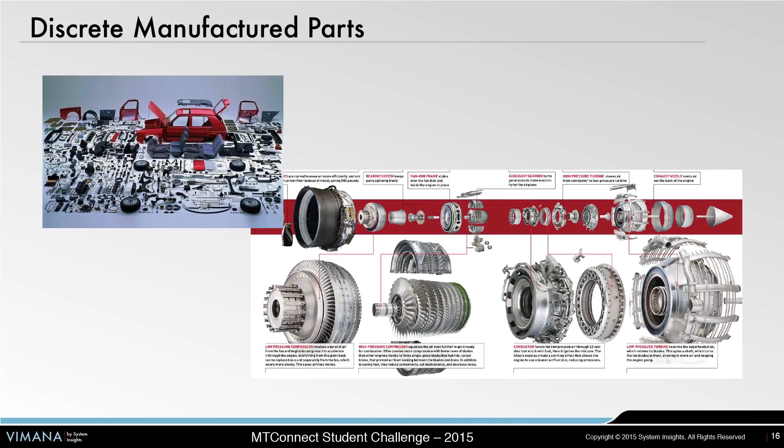Discrete is basically taking something like here, you have a raw forging of a drive shaft, you do a series of machining steps on it, you come up with a finished part, and then there's an assembly process where you put the various bits and pieces together.

MTConnect, to narrow it even further, is interested in that manufacturing step, basically the processes involved in either additive or subtractive material—adding or removing material from various pieces of metal, plastic, whatever.

The other thing we're concerned about, and getting into right now in a big way, is process flow. If you think about things like the digital thread and how manufacturing is executed, it's not just on one machine—you go from machine to machine. This is actually the process for making a drive shaft. There are all these different processes, and each process is executed on a different set of machines.

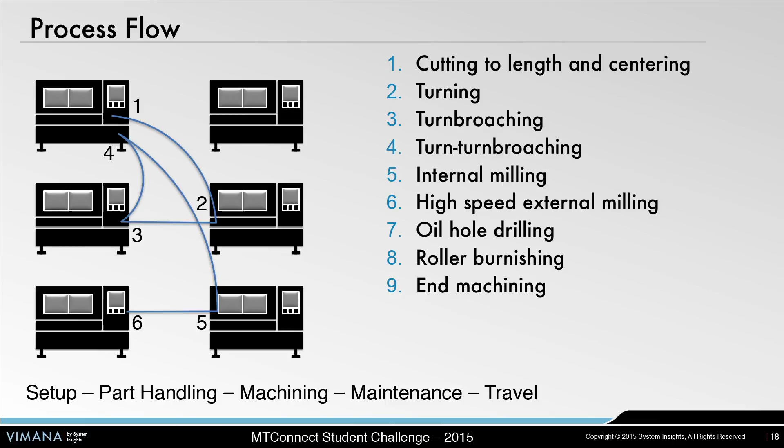So there'll be travel time, part handling, setup and tear down of those different machines, and so forth. We're concerned about basically all of these timings and how the process flows, how effective it is, and how optimally we're executing those different processes on those different machines.

If we think about it from the standpoint of data, the machines on the floor are giving a huge amount of data out. So if you look at your standard CNCs, lathes, and everything else, don't try to read it - I'll give you examples later. So you're getting a lot of data out of these different machine tools.

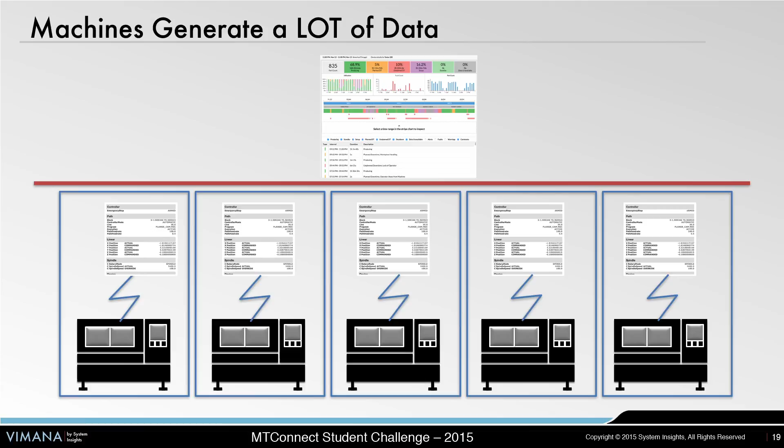But to be able to actually do some analytics and to be able to understand how the processes are performing, contextualized within the entire manufacturing process, it's not possible right now because there's this barrier between the information coming off of the machines and whatever kind of analytic applications you have.

If we look at the entire market, we look at what's going on right now, 95% of the shops out there are what we consider dumb. Basically, data collection and even basic monitoring - collecting data from machines, understanding what the machines are doing at any point in time - is very low. The number of shops actually doing this, especially small to medium manufacturers, very few of them are doing anything even simple like monitoring.

We have monitoring applications, a lot of those out there today. So this step here is not too hard to get to, but a lot of people are still using paper and pencil and stopwatches. The next step up is things like real-time analytics.

That's when you take the data and you start analyzing it and understanding what's happening and why it's happening. So you're able to take your basic monitoring, backward-looking reporting, and start to predict forward - like, okay, the machine is down, why is the machine down? Can we tell from the data and the context of the process why this machine is not operational right now?

The next level you can go up to is proactive, where I can now say, I see that this machine is about to go down, let's do something about it. Let's alert somebody so it doesn't go down and we don't lose production.

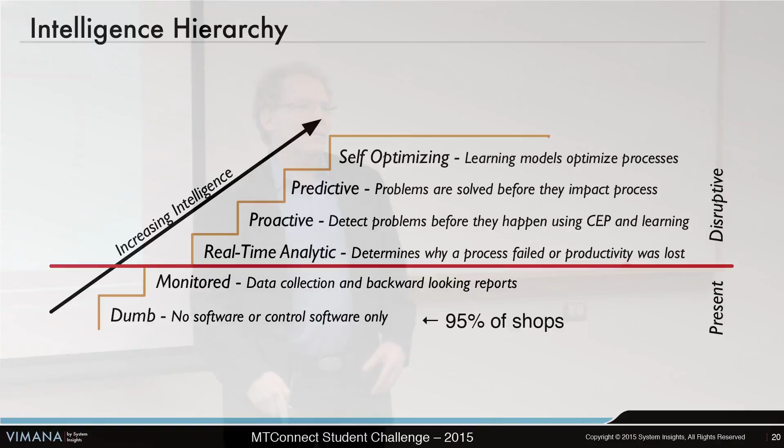The next step is where the systems actually start to self-optimize. So we're still talking about human-in-the-loop processes. Now we start talking about things like self-optimization, where you can actually have the processes figure out optimal strategies for being able to manufacture parts.

It's not just where I'm going to have a set of pre-described weekly schedules. Now the system can work around various different congestion, maintenance issues, tooling issues, process issues in near real time or real time, make decisions, even decide, send it out, keep it in, these kind of things.

Of course, the final step is where we start getting into your Terminator 2 Cyberdyne type scenario, where machines take over the world and kill all the humans. But that's to come later. So we're still trying to get to this step here. We're a long way from that.

So anybody familiar with the small to medium manufacturer? Has anybody worked in a shop or done an internship there? Okay, so a few people. That's good, more than I had last time.

So small to medium manufacturers are typically companies that are below 500 people and have modest revenues, but they do make up a large portion of our industrial base. If you look at the number of firms, there's actually around 250,000 firms out there right now. So it's a huge number of these.

So we think about how they interoperate with everybody else. Basically we look at supply chain tiers. Your OEMs are here - those are big companies like Boeing who sell aircraft. But if you look at Boeing or GM or any of these other big companies, there's actually a huge number of tier 1s and tier 2s and all the way out to tier 3, 4, 5 suppliers that come in and provide parts to those companies. They don't make everything themselves.

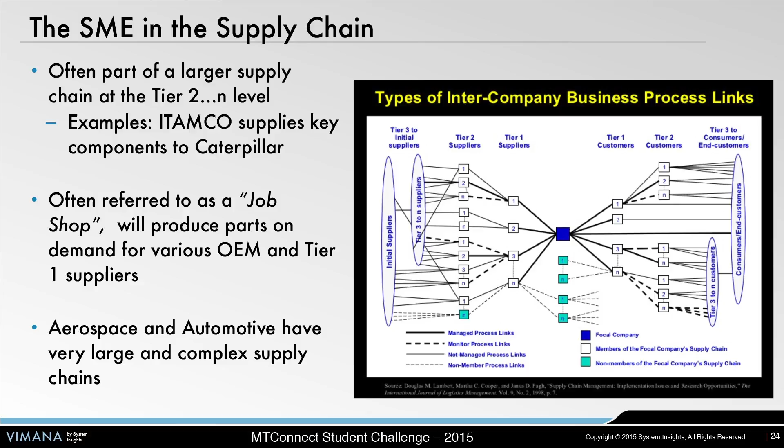Actually, a lot of innovations come out of your smaller SME shops. Itamco is a good example - that's actually the guy who won last time, Joel Neidig, who did the Google Glass thing. He works for Itamco, very creative guy. And they are a big supplier to Caterpillar, doing a lot of the huge gears and parts that go into Caterpillar equipment. I think they're around a tier 1 or tier 2 supplier as well.

And then, of course, you have the other direction, which is the customers and the supply chain going out that way. So you look at aerospace and automotive, there's these very deep, complex supply chains with redundancies built in. If you ever looked at anything from Apple and Tim Cook, they have this mesh of companies that supply parts and components so that can never go down.

There's another type of SME also. I'll use Task Force Tips, actually a customer of ours, who makes water cannons and nozzles and really cool firefighting equipment. They're in Valparaiso, Indiana, and this is another type that produces very specialized, complex parts, and they are the leader in this type of equipment in the world. So they're incredibly innovative, and they have fairly small production because there's only so many of these things needed out there, but they knock everybody else out.

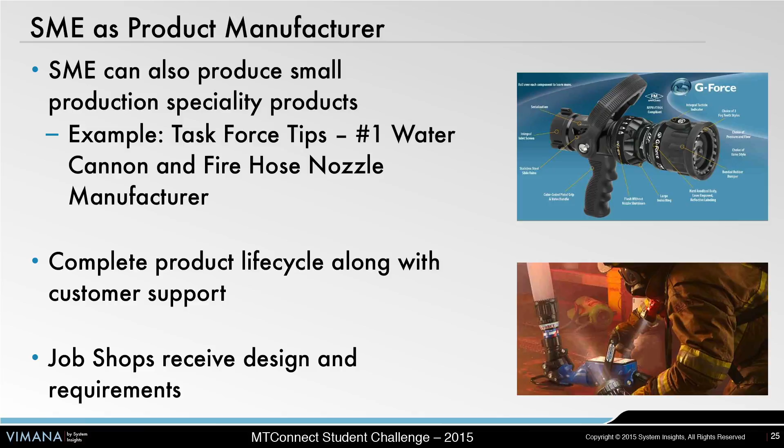So there's these types of companies, and they deal with the complete product life cycle. If we talk about supply chain SMEs, they're usually getting designs and requirements from other companies and then developing products for another company, versus these types of companies which are actually going from the initial ideation part, thinking about what to do, all the way down to the final product and then delivery and so forth. So that's kind of to frame the SME boundaries.

One problem that we have with SMEs right now is technology. If we look at your standard SME out there, there's not a lot of IT or OT staff. Larger companies usually will have dedicated information technology groups and operational technology groups, and though that's sometimes even problematic in and of itself, a lot of these smaller shops don't even have an IT department - they're just kind of pulling wire and hoping for the best. A lot of the machines, people are afraid to actually hook up because they're afraid they'll get viruses, so they just keep them completely disconnected.

That's called an air gap, where you either completely isolate your operational network and don't connect it to anything, which limits the amount you can do with it because you can't really get data off of that. You can't do any interesting analytics or use any services that are out there. The larger ones also usually have some form of a firewall, but again, the number of technology solutions you can bring to bear are very few.

So that's where we start getting into some blockers. This is actually a small video on Digital Thread that shows you a little bit about the design side of it, and what some of the blockers are.

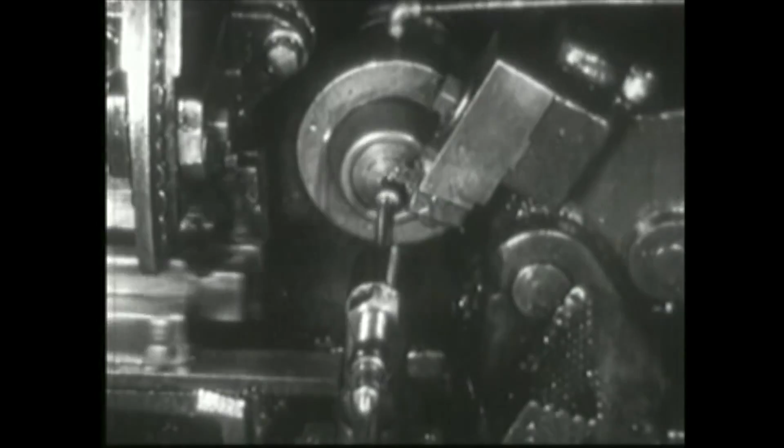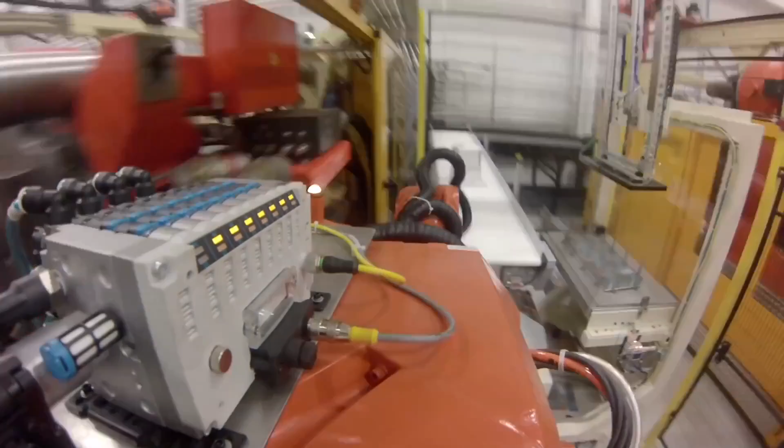When it comes to manufacturing, we've come a long way since goods were made by hand. We thought we'd arrive when we could team up with machines to make things, until we built machines that followed our orders and could work on their own. But one problem is yet to be solved: even though today's machines are smart, they have trouble communicating with each other. They're like kids playing the game of telephone - someone starts out a phrase that gets passed from kid to kid.

But I admit, when I was a kid, I'd like to change it up a bit, just to have some fun.

Even if I did behave, the message never came out the same on the other side. It's often the same with machines in manufacturing.

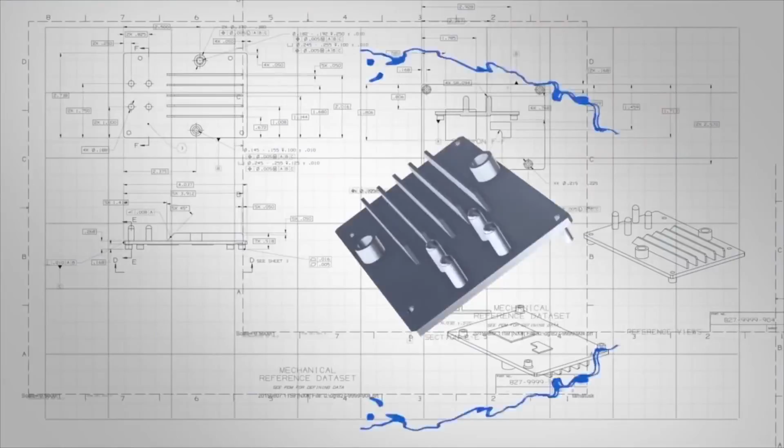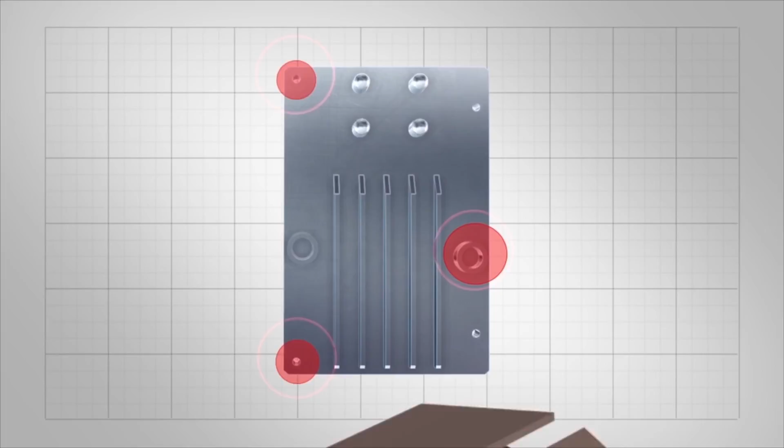A product's design starts out as a three-dimensional model. But if one machine doesn't have the right software, the design may have to be bumped down to a flat two-dimensional drawing. Then the information must be re-entered by a human so the next machine can do its job. Details can get lost in translation, and errors can creep in. A mistake may not be caught until the part is delivered and doesn't fit or isn't what was intended. The results? Wasted money, wasted time, and stressed out workers.

Here at the National Institute of Standards and Technology, we think we have a fix. The digital thread is a way for different machines in a manufacturing process to all follow the same set of digital instructions. Deviations are caught automatically, which ensures the end product is the same as the original design.

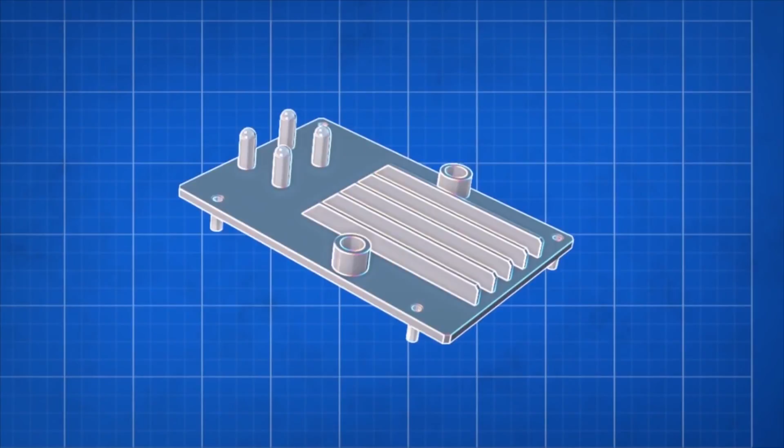I'm heading out to Middle America to see a digital thread pilot project in action. Iowa, a state that's all about corn and caucuses. Oh, and manufacturing.

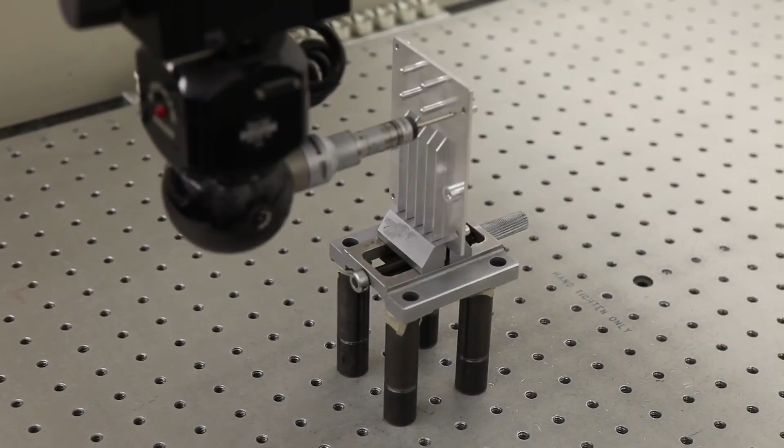Farming hasn't been the biggest thing since I was a kid, so now we've switched to high-tech manufacturing. In the digital thread pilot, Geater's smart machines will follow the 3D instructions supplied by Rockwell Collins to make a heat sink for an aircraft circuit board. If all goes as planned, each machine in the process will understand the same digital language. During each stage of production, the product is checked against the original design and any discrepancies are auto-corrected.

I'm heading 42 scenic miles south, where it all comes together, at Rockwell Collins. We're going to see if the part produced by Geater meets the Rockwell Collins specs.

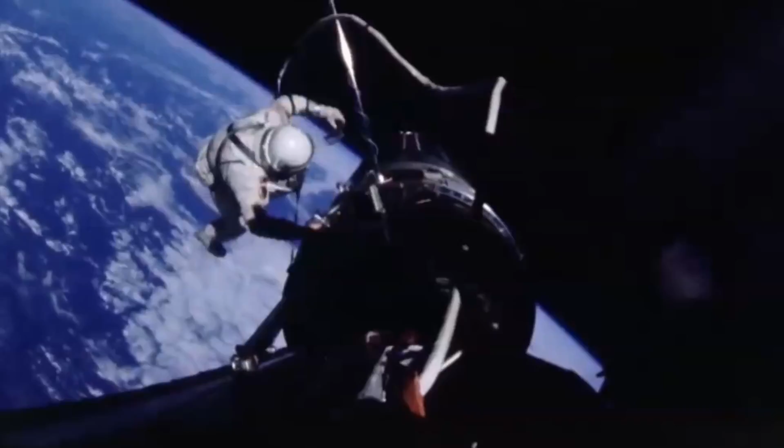If you want to talk about a company where accuracy is truly a life and death matter, look no further. Apollo, Gemini, Mercury, every mission used Rockwell Collins communication equipment. Here, getting things right is pretty important.

Hey Kevin, what's going on in here? Oh, hi Tom. We just got done inspecting the latest Gator part. How'd it turn out? Everything came out great, it's a perfect part, not any unintended holes or anything. That's great, this is fantastic. We can take the original model, feed that right into manufacturing and building the part, right into inspection, and the same model is used throughout the process to look at the part.

The digital thread. It just might stitch together the next industrial revolution.

Has anybody heard of this? There's this concept called IT/OT and a divide between them. IT/OT is basically the information technology and operations technology groups. And if you think about it, your IT group is maintaining the entire organization, the enterprise. They have their systems kind of locked down, they have the barriers and boundaries set for that.

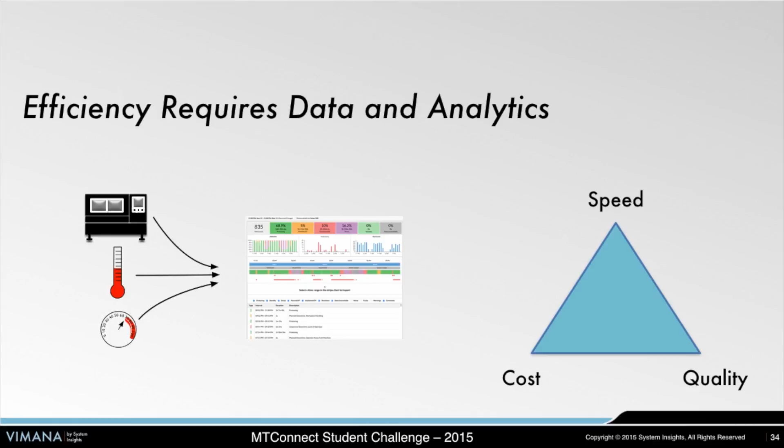For us to maintain that and even gain ground, we need to be more agile. We need to be ahead of the technology curve. And that means being able to take data and apply analytics to it so we can reduce the cost, increase quality, increase the speed. So you have the standard trade-offs here. To be able to make those trade-offs and improve our processes, we need information. And that's where things like standards come in.

So the MTConnect standard basically is a common way to get data from manufacturing equipment. It provides a single point where you can get a vocabulary, a common set of words, a common protocol to get data from all of your manufacturing devices. It's free, it's open, all that good stuff. And a lot of the big manufacturing companies, a lot of the big machine tool builders have already implemented it, like Mori Seiki, Mazak, Okuma. A lot of these big companies have already done it. It's available for many other machine tools and controller types like FANUC and Heidenhain and so forth.

So with that technology, you can start getting data from your manufacturing equipment, and then you can start applying it to basically bridging that IT-OT divide. So starting to get the data out of your machines. One of the things we talk about is basically pushing this boundary. So yes, I have these machines, they're vulnerable, they have issues, but can I push this boundary as far over as possible? Now, instead of quarantining the entire system, I'm just quarantining the device itself. This is called edge analytics or edge security.

And then we can start pushing the data out with standards and other technologies and secure protocols. We can start pushing the data out. And then we can start making use of a lot of these IT technologies that are out there, like cloud services, et cetera. And then there's a whole host of new technologies and new techniques that we can use. That's part of what this whole thing is about, thinking about what new processes, what new technology will bring to manufacturing, and how to optimize and get maximum performance out of manufacturing systems.

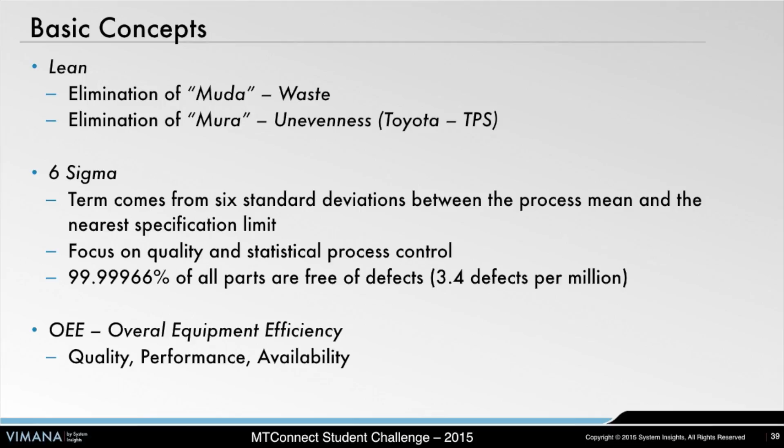The last one I'm going to go through is OEE, or Overall Equipment Efficiency. It came up from the equipment builders to make sure the equipment was functioning correctly - done by the machine tool builders. There's a paper on it from AMT which is really good about how to calculate OEE and best practices.

It's around 3 different pivotal ideas: quality, a metric for how many parts are good versus total; performance, how fast my actual production process is compared to what I originally predicted it was going to be; and availability, how much time my machine is actually producing versus the time it's scheduled to be producing.

Now, if you look at some of the automotive systems, they don't really believe in inventory.

It's basically single part flow all the way through, so it's just one part being passed station to station, flowing through the processes.

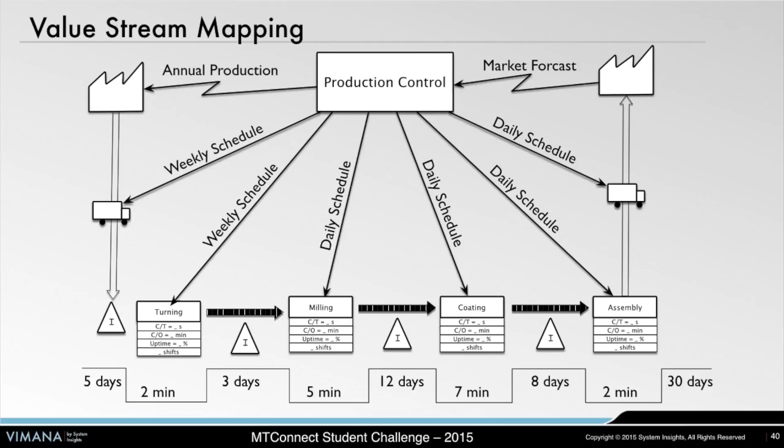These value stream maps are fairly static. We need to get to a more dynamic version of value streams. To be able to do that, we need to understand time. And I'm going to go a little bit through OEE now.

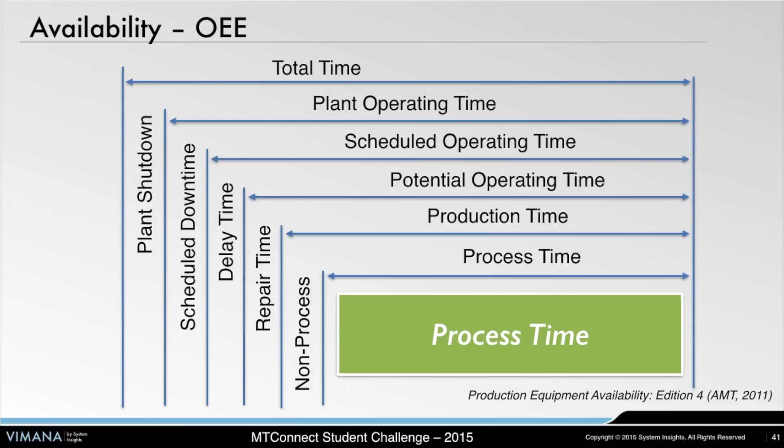So if we look at our scheduled downtime, according to our schedule, these buckets from delay, repair, and non-process - we're trying to reduce those as much as possible so we can maximize this and have the machine operational as much as possible.

And if you're not collecting data, it is really hard to be able to optimize that time. So this is a quote from Kelvin: basically, if you don't measure, you can't improve.

And again, to go back to that number - only about 5% of shops right now are collecting data. And if you're not collecting the data, if you're not understanding what's really happening on your shop floor, it's almost impossible to really improve those systems effectively, because you have to understand what the machines are doing, and you need to do it in near real time so you can react to problems that are occurring in the manufacturing execution systems as they're happening.

And this goes back to the small to medium manufacturers. But what are they worried about? Quality, on-time delivery, making sure their processes are consistent, executing correctly. They need operational visibility, and this operational visibility goes up and down the supply chain.

So if you think about it, a small to medium manufacturer, if they could report upward how effectively they're executing, it may actually help them increase the visibility of their processes and reduce the number of surprises if things are running behind or if they run into a manufacturing problem. They may be able to get the higher level, whoever they're supplying to, to understand what's going on and make adjustments more proactively instead of waiting until it's too late.

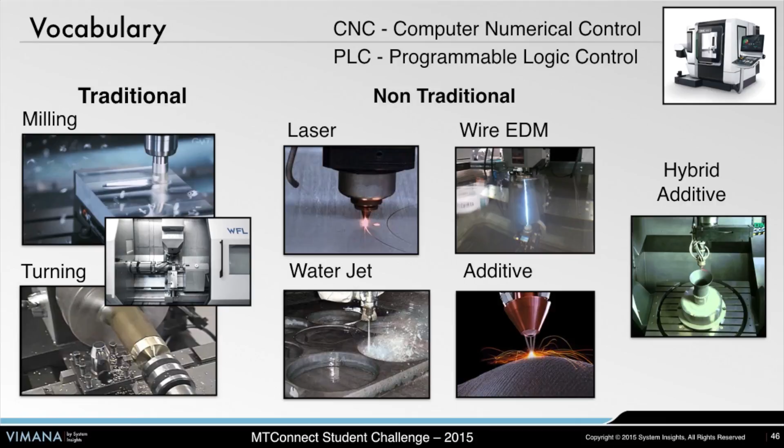We've recently got into things like wire EDM. There's a group that's now thinking about additive, and some of the machine tools now, some of the milling machines are now doing this hybrid additive. Heard about that? Where it's a little bit of both. Are people familiar here with wire EDM? Okay, great, a couple. Yeah, sometimes people don't know too much about that, but it's something that we're getting into right now.

And we also handle both CNCs and PLCs. So for milling and turning processes, we've integrated with most of the big controller and machine tool builders in this space. And we've also added, in a couple of cases, sensors.

So the other thing that MTConnect provides is sensor data semantics, across a broad array of sensors. So we went into sensors, we found that there wasn't a good standard out there for collecting data from like even thermistors, vibration, acoustics. It actually surprised me when I found out that there were no standards out there which standardized the units and the vocabulary when talking about these things. So MTConnect actually took that on as one of its tasks to standardize sensor data.

So one of the things you can do is actually hook up like an Arduino or a small sensor device and get data and pipe it through MTConnect. We've actually done it at up to like 8 kilohertz in XML, which is even more bizarre, but it works. And it's pretty effective. I can even show a demo at the end of this if everybody's interested.

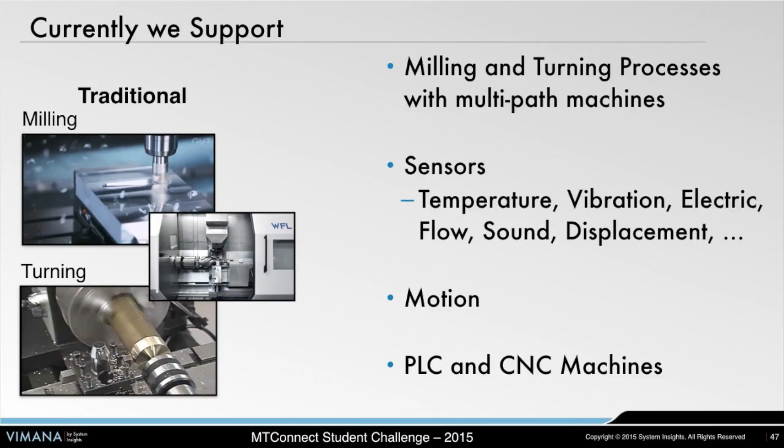We handle motion, various different axes, rotary and linear motion. And we handle the translation from PLCs and CNCs to the common vocabulary. So when we talk about things like machine tool states and so forth, we handle all that.

For wire EDM, one person heard of it, so we're now working on standardizing the vocabulary around wire EDM processes. These are machines that take incredibly highly charged wires and cut through hard metals like titanium. They're great for doing roughing operations where you want to remove a lot of material. If you think about it like taking a hot wire and cutting through styrofoam, that's pretty much what wire EDM is, but for metal.

There's a couple different flavors of this. There's your wire where you're just dragging the wire through the piece of material. Some really complex geometries are possible because you can actually twist the wire in various different ways. We're also working on sinker EDM and other EDM processes where you have an electrode, even up to, I've heard, the size of a car bumper, which can basically plunge and remove huge amounts of material very quickly.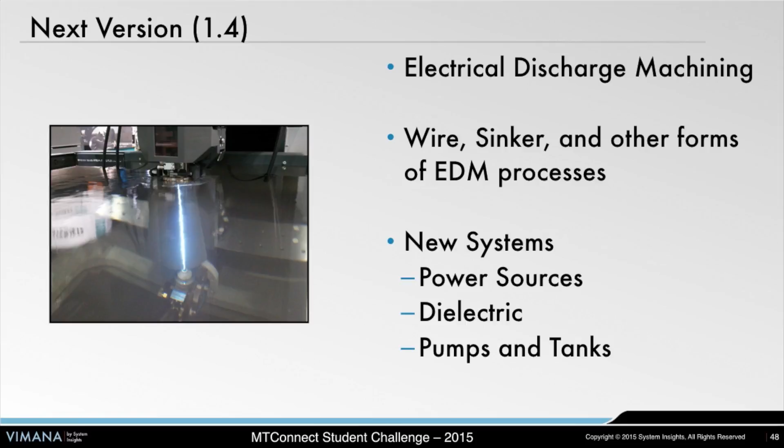We're going to be modeling high energy power sources and dielectrics, pumps and tanks and so forth. So all those types of systems and components are going to be modeled within MTConnect. So to look at a high level of where MTConnect comes in...

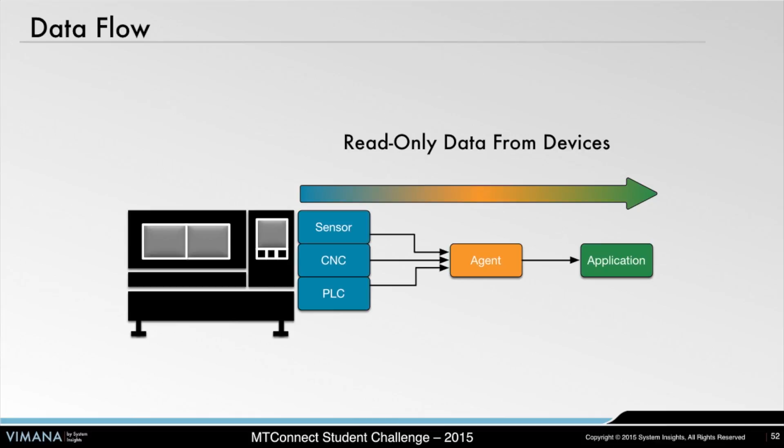And again, it's read-only data flowing out of devices. You have your various different inputs, and they all go to the agent. Now, one interesting idea here is what we call sensor fusion.

We're getting this binary data off of the machines, off of our sensors, and fusing it together. MTConnect has this idea of timestamps—if you don't timestamp every single piece of data, you can't really reconstruct causality. So we allow different data streams to be merged together and given a consistent timestamp in the agent. The agent can even do relative time, correcting for clock drift.

It can also have a millisecond offset and reconstruct the real time from that. So every piece of data has an existing timestamp, which lets you figure out when the machine was in a certain mode, and what sensor data you were collecting—temperature, vibration, loads on different spindles, position, spindle speed, feed rates, all the data about that machine. Now I have sensor data coming out, and I know exactly when everything happened. The timestamps also let me collect data, and even if I don't collect it every single millisecond, I can still reconstruct the entire chain of events and associate them together.

So the first step is we get this data coming out, all fused together. Then the next step is a syntactic transformation—things like OPC, Ethernet IP, and other protocols, where you're basically assigning a tag value. The tag is some arbitrary name you give the data, and the value is some value in a set of units that are probably local to the machine.

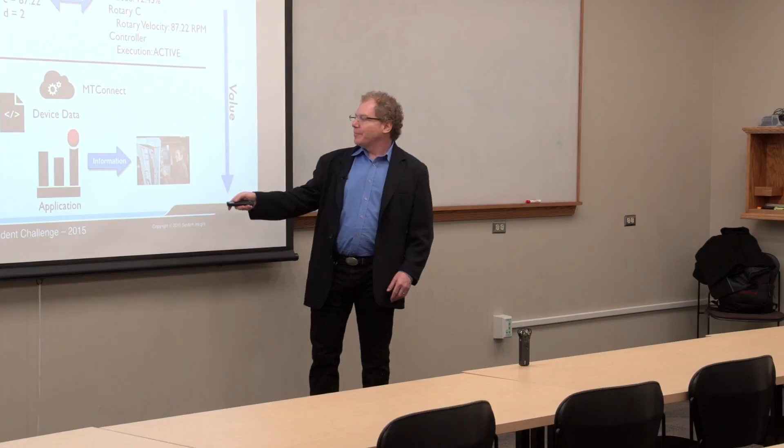Once you do that, you can start writing applications and actually getting knowledge and information from the system—otherwise it's just raw data. That's the whole value proposition. As we start to bring data from various different systems together and integrate it, the idea is we're going to bring multiple different services together.

If we look at equipment manufacturers, this is the area we're providing. MTConnect is really a service—think of it as an HTTP RESTful service where you make a request, you get data back, and you know what the data means. That's what this represents here.

Eventually, design systems, supervisory systems, and engineering systems at different levels will also be providing services that we can integrate together. This is the first step toward interoperability between multiple different systems. That's how we get to the next industrial revolution—through interoperability and integration of data and services across the entire digital thread. That's how we can start to achieve things like self-optimized and self-aware systems.

From the point of view of what we can do now, we're really talking about continuous improvement processes. You're continually trying to improve your business and make more money, and to do that you need data. So we need to look at optimizing your execution processes and keep optimizing those. Once you get to a certain level of productivity, you can always get more out of it, find better ways of doing things, improving your processes, and increasing your workforce training.

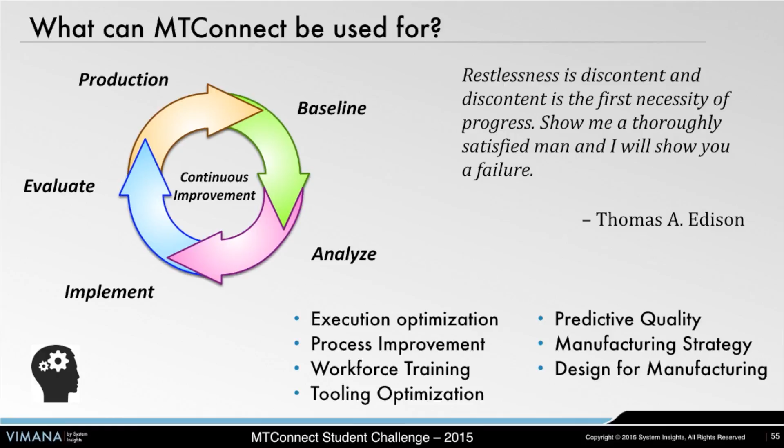Strategies for how to manufacture something, processes, etc., and then design for manufacturing—looping back to engineering. Basically, I can say okay, this is how execution happens: when I engineer something and create a part program and a tool path, this is how it's actually executed. This is the efficiency—let's talk a little bit about that. There's a couple of research projects we can go over.

The other place is going all the way back to design. If I design a feature in this way, this is the entire chain—this is how it's going to come out at the end, all the way through the engineering process, the tool paths, and then to the execution. Often in the engineering stage, a lot of assumptions are made about how it's going to be executed, with simulation and so forth, but often that doesn't come out right because the machines don't quite operate the way simulators operate, and things don't quite work the way they do in an idealized world—physics and reality come into play.

So we need to understand exactly how that translates, and by collecting data and analyzing data, we can actually get to the point that we can start to make predictive assessments of these things.

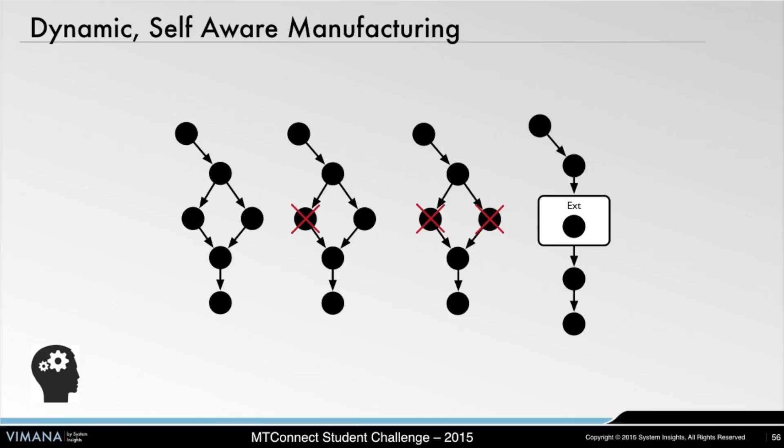And the other area, when we talk about process, is basically what we talk about more self-aware. I've come back to this a few times, of being able to redirect.

So if I have a failure, we can work around failures. We can even assess the trade-off between doing something externally or internally. So if I want to manufacture at another site, and that's actually going to be more efficient than if I try to do it locally, I can do that. I can make these assessments because I know the actuals, I know how things are actually going to play out in my manufacturing process.

And that's where we start getting into what we were just talking about - Industry 4.0, digital manufacturing, predictive, and so forth. All these big terms that everybody's talking about these days. That's how you're going to be able to achieve it.

Another area that we've worked on within the standard is machine to machine and automation, and we have an interesting way of doing it. Is anybody here working on robotics and process automation, things along that? Okay, kind of, good. At least, okay, see what you think about this.

So one of the issues that we ran into - I'll jump forward a couple of slides and back it up later - was the fact that most integration of systems started with sort of a 24-volt wire connecting two different machines together and working with PLCs.

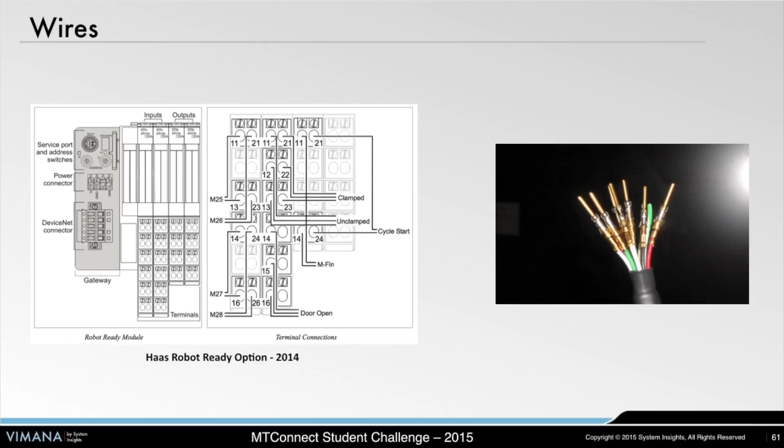The problem is that this solution here - you have a cell controller, a bunch of PLCs which integrate the different systems together, custom interfaces all over the place, and you're dealing again with these sets of wires and this multi-level sort of binary signals going back and forth, and then some vendor applications there to support the integration of these systems, and often they're just one-offs. They're pretty bespoke - if you look at most cell setups, they're pretty one-off type solutions.

We were trying to get into a cheaper, simpler alternative. I did a project with NIST and ROS and NCDMM where we integrated machines and robots together using a simple IT-based approach, where we just connected through the network the device control, the machine tool and the robot, and created sort of an executive process which received real-time data, but highly semantic data about what these machines were doing.

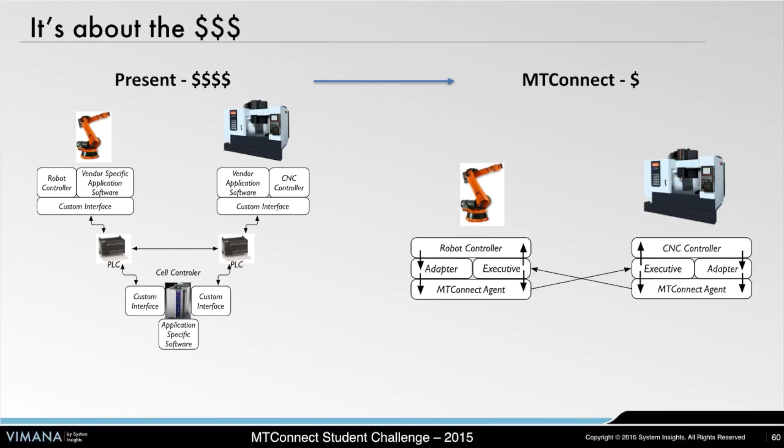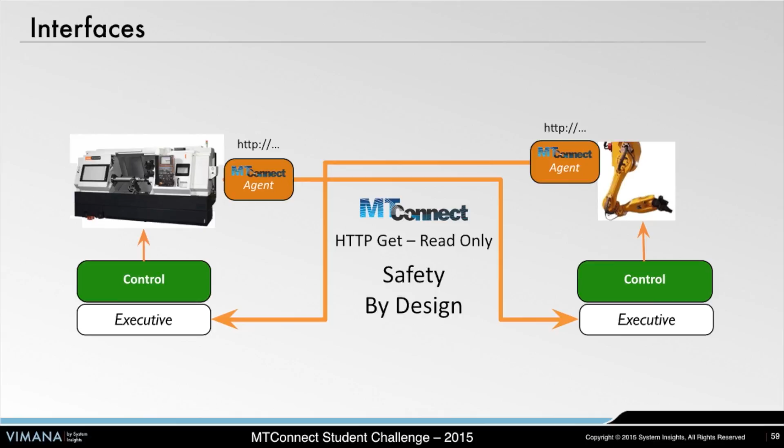And basically the way it worked is each side was listening to the other side. So the machine tool listens to the robot, and the robot listens to the machine tool, and we spoke at a high, what I call semantic level.

So instead of binary signals, we were talking about what the part was, and things like - the robot didn't say move, or the machine didn't say, robot, you move to this position and get this, pick up this piece of material. What it said, the machine tool just said, I need a piece of material. I need something to do. I'm ready to accept material.

So there's an interface that we created called material load, and if the machine tool says it's active, it's waiting for something to be able to fulfill that need - a robot, or it could be anything, really. And then the robot says, okay, I've taken your task and I'm executing your task.

And then the robot asks the machine tool to do things like open its door. The machine tool then says, okay, my door is now open. And it says, okay, I need you to close your chuck, because it knows the machine tool needs to hold the material. And then it waits for that to be done. Then it knows it can release and retract, and it tells the machine tool, okay, now it's okay for you to close your door. These are just requests that are coming back and forth.

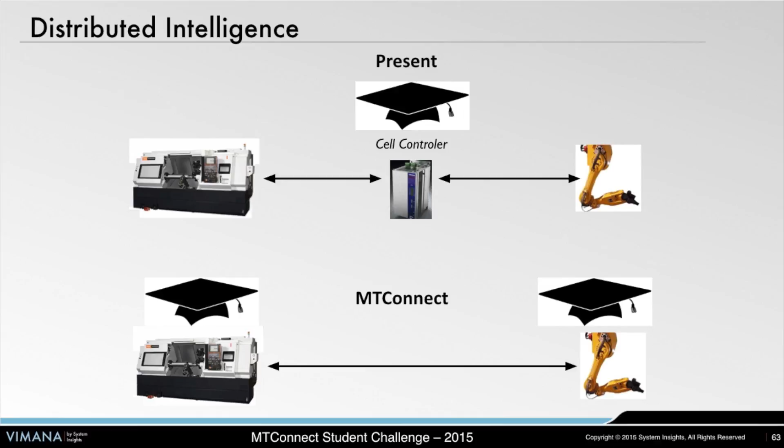It's not actually telling it, it's just requesting that you do this, so we can get a complete operation. The idea is when we elevated everything up to that higher level semantic, we found that was actually pushing the intelligence out to the edge devices. So instead of having a centralized control system trying to orchestrate all the behavior of these different systems, we had each system taking care of itself and knowing what it needs to do. By distributing this intelligence to each of the edge devices, we found we had better resilience and no single point of failure, and also a dynamic system where we could change over parts.

Instead of communicating just a single byte, now the robot was saying, I picked up this type of part, I know the part ID. And the machine tool can say, okay, especially with the new stuff we're coming out with in our parts addition to MTConnect, I know what part program I need to run for that part. I know what the processes were before me and after me. I know all this information about this part. So it has this rich information model now about the process it's about to execute. The machine tools are able to make intelligent decisions, and the robots are able to make intelligent decisions, and basically you get this next step of dynamic flow.

So that's another area that MTConnect has dealt with, this idea of dynamically connecting devices together and having them communicate, but at a higher semantic level.

I found out that we weren't actually the first ones to do this. It was done, I think, at MIT back in the 80s. But the computational power necessary to just coordinate the messaging wasn't there, and the networking wasn't there. And the cost savings were huge.

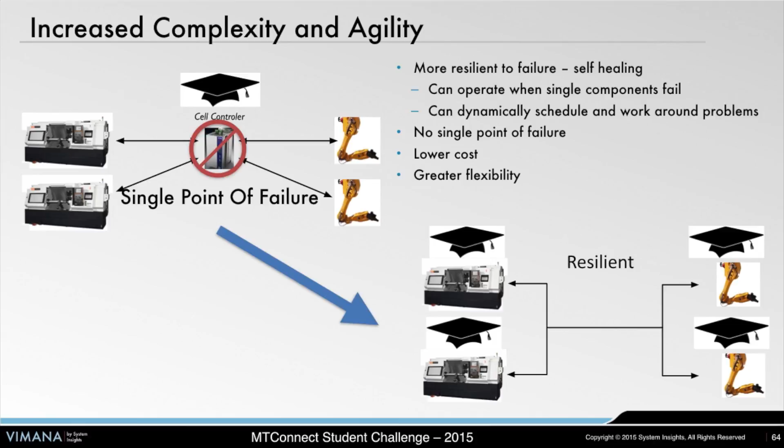So if you look at the advantages to the SME or the manufacturer, we got rid of all the PLCs, we got rid of all that additional equipment. We were able to get to just a couple of applications running on either side.

So the question was, does the machine need specialized sensors and other equipment to be able to interoperate? And the idea was, yeah, right now there are special requirements because the machines don't come with it at this time - we're just starting. The idea of standards, and the reason you create open free standards, is so that you can get machine tool builders to then implement them.

So let's say if you bought a new Mazak or an Okuma or a Mori type machine, or any machine like Haas or whatever, and it came with this interface ability built into it - we were trying to get to plug and play, so I'd be able to plug my robot into that machine and it would just be able to communicate. Well, we have a project going on to actually prove out some of this, where machines will be discoverable, location will be discoverable, where the machines can communicate their capabilities, and you'll be able to understand where they are and what they're capable of doing. And then you won't need special technology.

Even with things like a universal robot, which you can put without an enclosure, you could just park that in front of a machine. I know a couple of shops doing this, but it's a very simplistic process right now, because things like the robot actually has to push the cycle start button to get the cycle going, since the machine doesn't have an easy way to integrate that information.

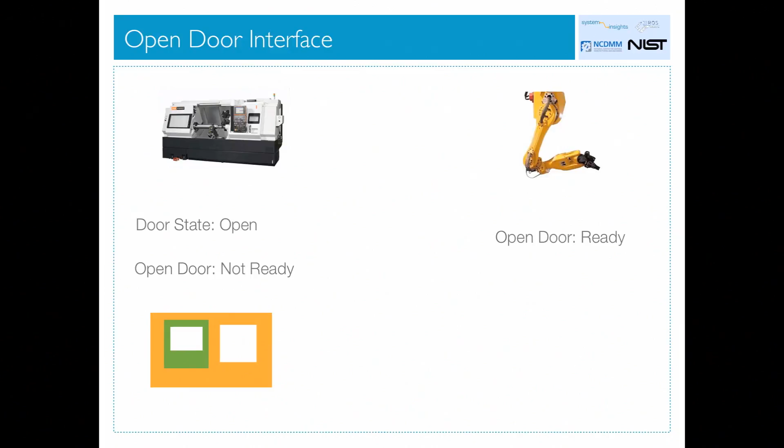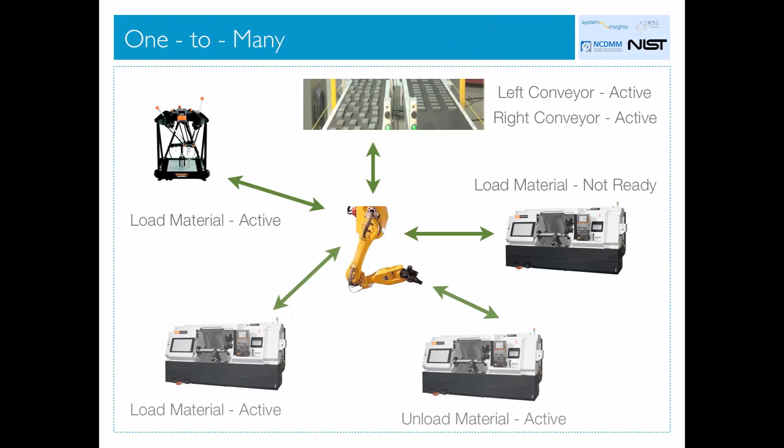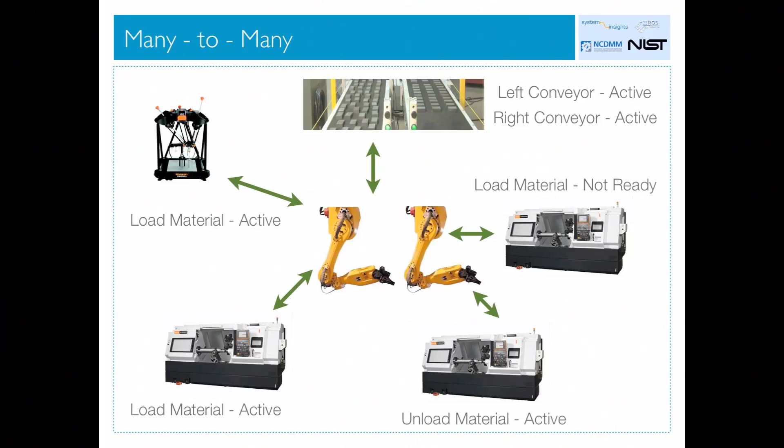This is peer-to-peer communication. The benefits of this architecture are the ability to scale from a single device to multiple devices, even different types of devices. When new devices are added, the communication between devices is identical to the one-to-one scenario. This architecture easily extends support of many-to-many communications, which enables fault-tolerant processes that are driven by demand and availability, not a preset sequence of operations.

So it's kind of a high level of what it is. So basically...

We proved this out at NIST and had incredibly good results as far as resilience and the ability to have processes self-recover. So when something went wrong, it pretty much just picked up where it left off. And the machines, because the robot wasn't dependent on just a very narrow view of the signals, it could tell what's happening on the machine tool.

They were reporting their entire state. We were able to make intelligent decisions about how to recover the process and how to carry on. And that sort of edge-level intelligence—being able to push more of the intelligence to make these devices more intelligent, getting away from single-wire solutions—I think will bring in a new era of automation.

That's my hope, anyway. So I'm going to go through a couple of research projects. These were actually done at various universities around the world, and this one's over at UC Berkeley. Give some ideas of things that people are working on right now, and I'll talk through some others.

So this is actually by Ronak, and he did some predictions using machine learning on manufacturing processes—basically efficiency and so forth. He's working at LMAS, doing his PhD there, which is the sustainability group over at UC Berkeley.

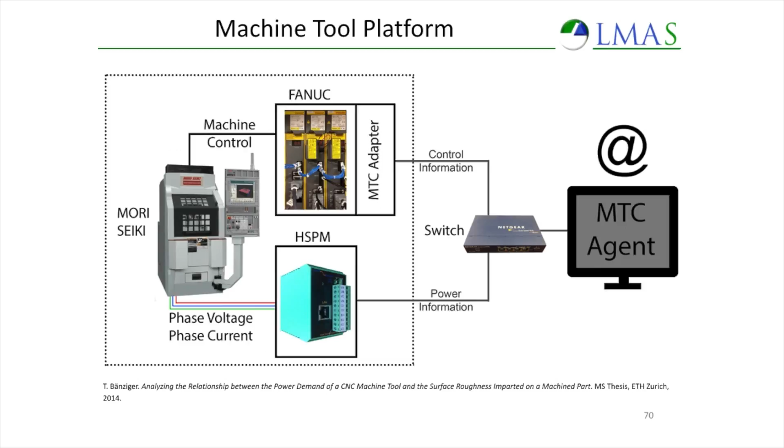Then he popped it into a switch, and that was aggregated in an MTConnect agent. MTConnect agents can aggregate data from multiple devices—we've even had like 50 different machines hooked up to the same agent. The agent, again, is that protocol server, so that's your point of contact for getting information from machines.

So we had the data from these different areas collected up, and this is your controller data—speeds, feeds, loads, the actual code being executed, so we know the block and line of code that's being executed. And we know how much power was coming off of the three phases coming into the machine. And he did this...

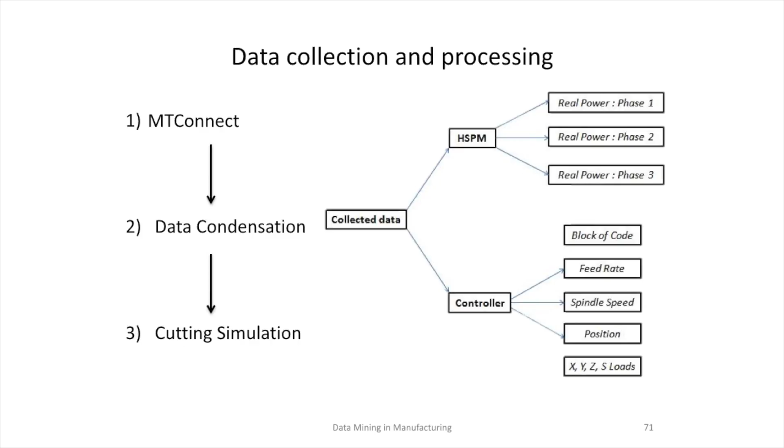...condensation and then simulation, so it was a two-phase approach. He's basically trying to collect data and then simulate based on what he collected. And then you're able to take that data in for higher levels of processing.

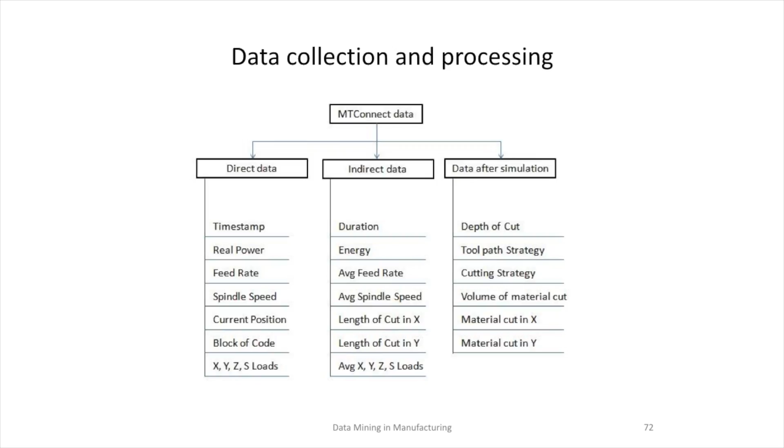So if you talk about the pipeline, after you go from semantics, you then go to what we call enrichment, where you take the data coming out of the semantic model and derive additional meaning at a higher level—things like depth of cut, toolpath strategy, cutting strategies, volume of material removed, and so forth. This doesn't come from your machine—it doesn't know how much material it's removing, it doesn't know how fast it's removing it.

It just knows what it's doing, the motion and everything else, and the positions that it's at. By combining it with your process data, you're able to come up with higher level abstractions. That's what we call an enrichment, where you get to a higher level of knowledge and assessment.

So again, it went through this whole pipeline. Then you could do simulation, make changes, simulate what those would do, compile it, and create these models. These are higher dimensional models. Basically he was going through this whole process of modeling based on what he was observing.

He was looking at different dimensions: spindle speed, feed rates, direction of cut, cutting strategy, length of cut, and so forth. These are all the different attributes he was taking into consideration. Then he looked at the energy used for each of these strategies and tried to optimize around that to predict the characteristics.

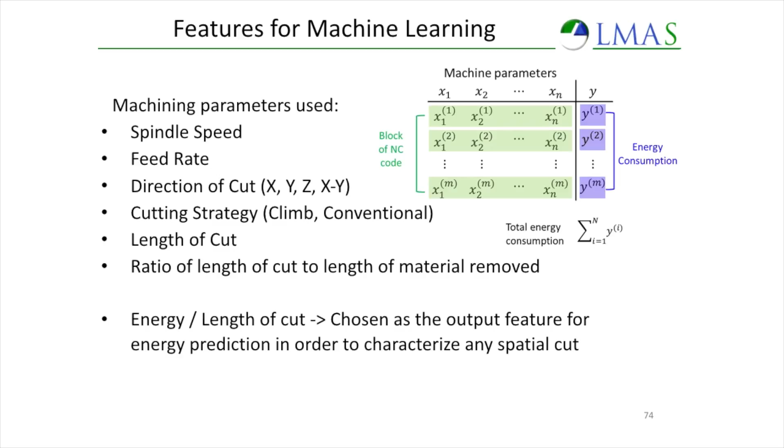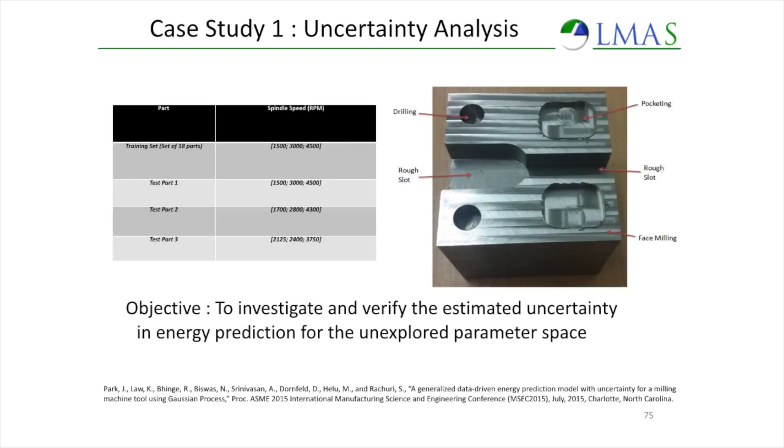This is the sample part that he used, along with some different test parts and various strategies.

Taking a look at these different strategies of cutting and toolpaths, his objective was to predict how well these different strategies would work by observing actual energy profiles. When you go at it from a purely first principles model, things often don't match up when you actually go to a machine tool. By testing this on the machine tool, he found it's not just about speeds and feeds, but a whole bunch of other motion, loads, and physics involved. He was able to optimize a model around that to find an optimal energy efficient toolpath for pocketing.

So that's one of the projects done with MTConnect. Using MTConnect and fusing the high-speed sensor data with the machine tool states, the blocks, and every execution state of the machine, he was able to pair everything up and know exactly what operations were taking how much energy to do this analysis.

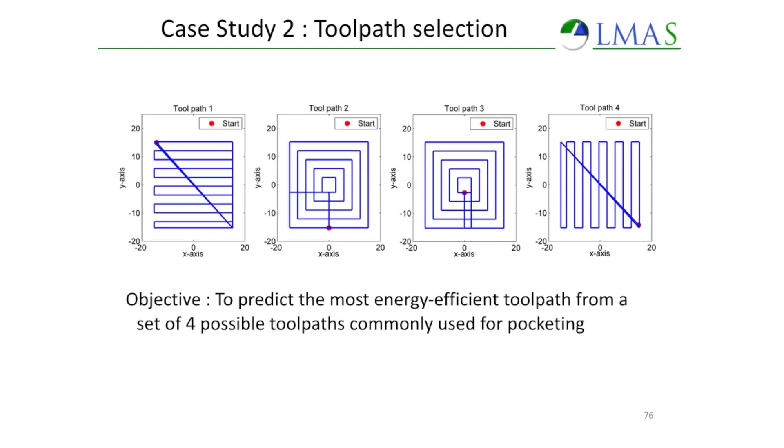This was actually done at IIT Madras, where we have an office in Chennai. This is one of the projects we do over there. The idea was to reverse engineer a machine tool from base principles, but use real data collected to do it.

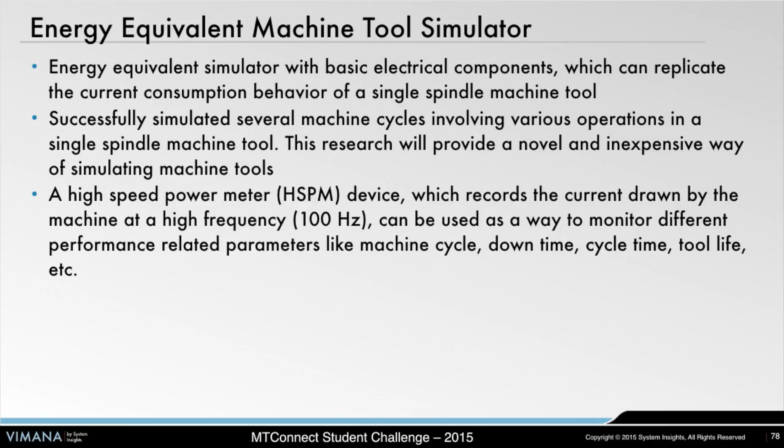So they built a machine which was just basically a load and a generator. I'll have a picture of it in a second. Then they collected 100 hertz data from a high-speed power meter, put it into a simulator, and were able to simulate pretty accurately the machine tool behavior.

This is the rig they came up with. It was basically a 3-phase AC motor with a coupler and a DC generator to put a load on it, and then a relay bank, which was pretty much just a whole bunch of these huge relays stuck together. Did a nice job of heating up the room as well.

Then a load bank controlled by an Arduino would switch various resistors on and off to simulate different load patterns for a real manufacturing process. They also adjusted the power going into the motor to simulate speeds of either the axes or the spindle. Of course, in manufacturing and metal cutting, you have to really focus on spindle speeds.

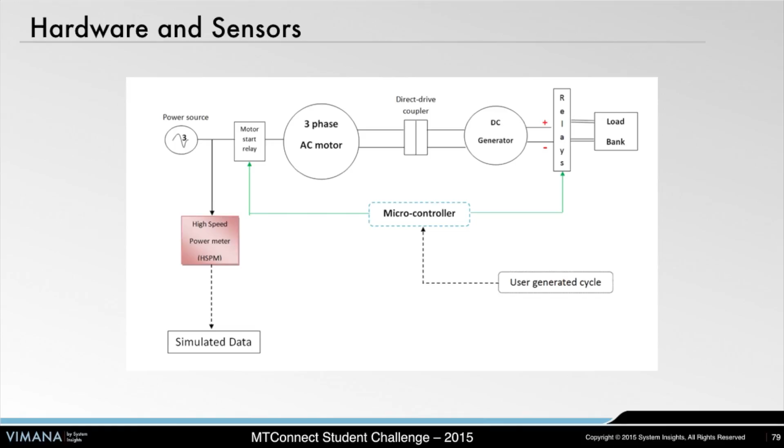That little microcontroller was just an Arduino, a pretty simple, cheap kit. The simulated data would be pumped into the system so that we could simulate the behavior of the machine.

One of the first things they found out was how fast you needed to sample—how fast is good enough. They tried 1 hertz, 10 hertz, and 100 hertz, and found that at 100 hertz they were able to get a fairly good fit of the spikes.

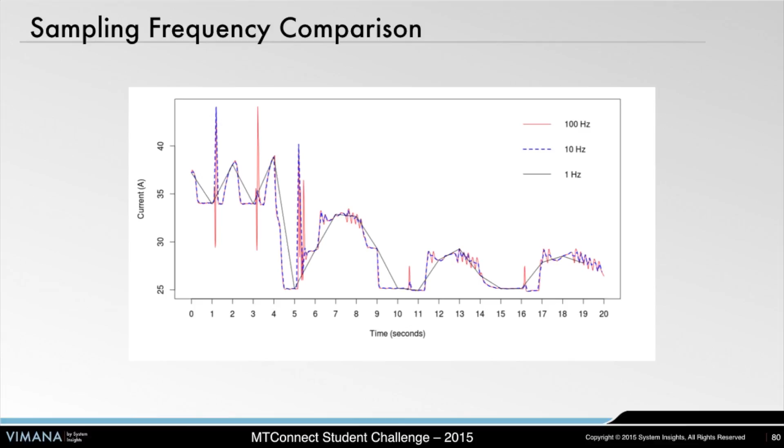The problem is that if you don't sample fast enough, you lose a lot of detail—you lose these spikes. Even at 10 hertz, you're losing a lot of detail here, and that can lead to erroneous assumptions about the way the behavior is going to occur.

So they also were collecting data from real machine tools. At the same time, they were setting up this rig, collecting data and running these processes on machine tools, and then looking at recurring machining cycles.

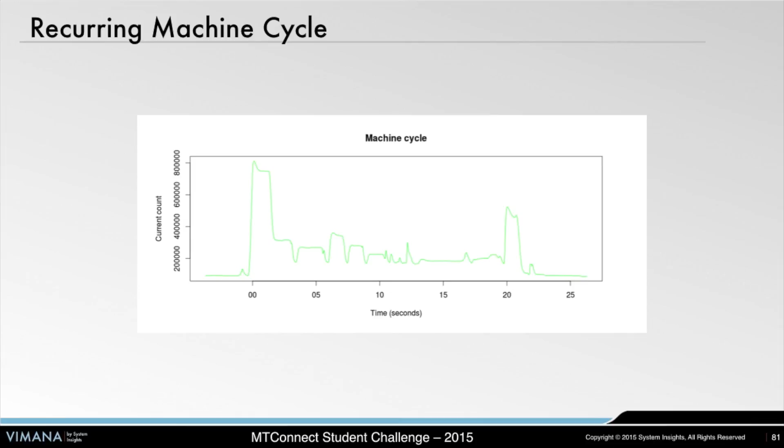This is a single set of operations: spin up, spin down. We look at it in a broken down form. This is your machine startup time right here, then you spin everything up, and then you're ready for operation. This is when you start your spindle, then your acceleration, your main accel, and this is motion to get to that point, and then this is when you actually start removing material, back down.

And this is your power down, your spin down, and so forth, and machine off.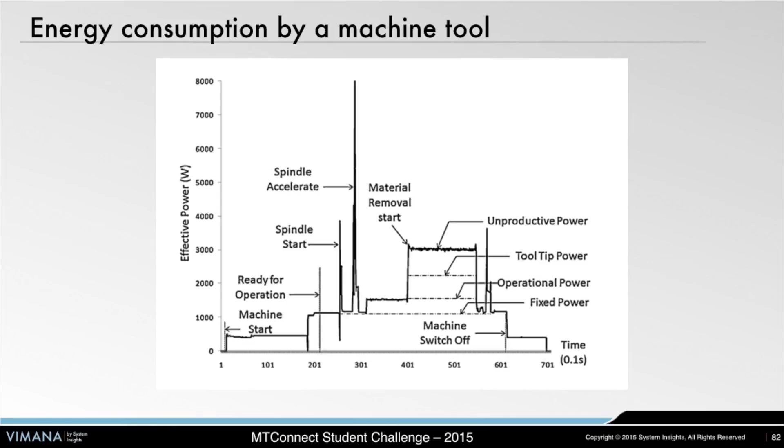So these were the fixed power. This is the operational power, meaning this is the amount of energy it takes to be able to spin the spindle, and this is the amount of tooltip power. This is based on simulation and theory, how much power it actually takes, and the unproductive power is the delta between those two.

So again, that was taking data coming off a machine and understanding what it was doing, then looking at just power data coming off of it, being able to fit it, and then reversing it out and simulate it.

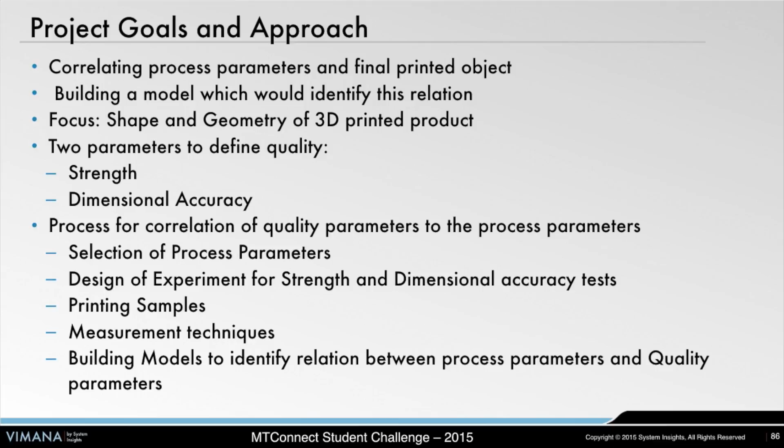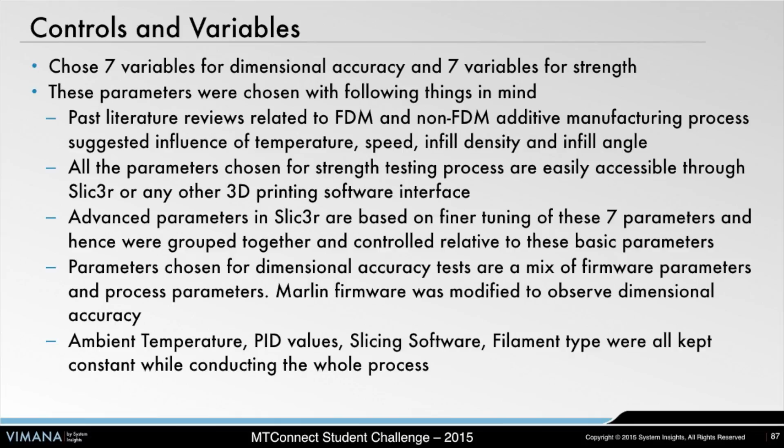So they did a series of experiments, and they used off-the-shelf software, open source slicer software, and reviewed literature and so forth, and then took a look at a number of different parameters for dimensional accuracy - temperature, PID values, slicing, various different things. I'll go through them right now. They worked on seven variables associated that they looked at.

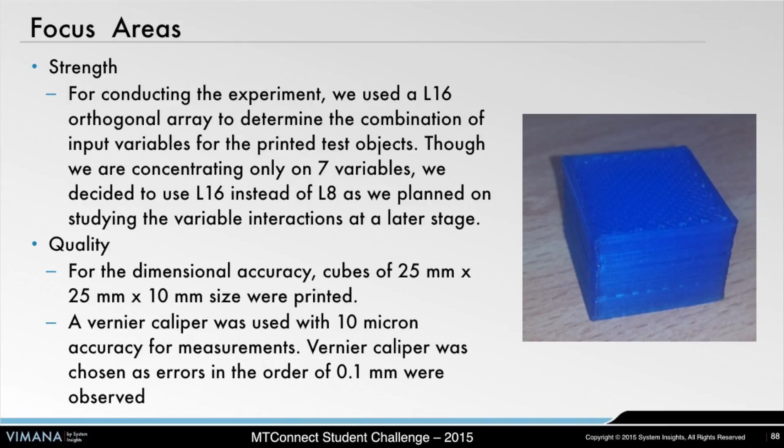They built this little cube to do the testing, and used a simple vernier caliper with 10 micron accuracy. They also used a tensile strength tester to test the strength of the part. What they were looking for was which factors, like extruder temperature, infill patterns, slice height, and density, were most highly correlated with the strength and quality of the part.

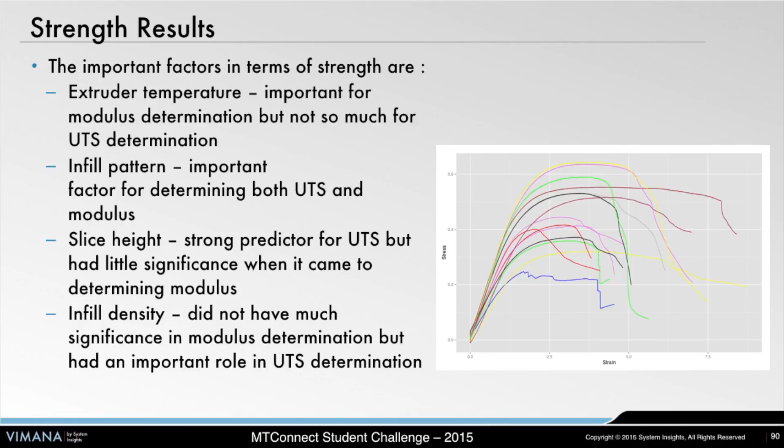I think slice height was a strong predictor of tensile strength but had little significance for modulus, and infill density was a predictor of tensile strength but not much of modulus. So there were some things that were expected and some that were unexpected. Temperature was a predictor for modulus but didn't really seem to be a big predictor for tensile strength.

There's more information on that out there. Anyway, I can point you at it if you're interested in that project. It can be used for interesting 3D printing projects as well. There's some other work going on in that space too.

So that's most of it for the first part of this thing. You can go into the standard itself if you're interested. Do you want me to dig deeper? Basically, from the standard itself, we have four information models.

We have what we call devices, which is a model of the manufacturing equipment itself - it's a logical model. And streaming data that comes out: this is time series values, time-stamped, which describe each data item you can get from each component and data about it. We have assets, which provide key value pairs of data, used for things like tooling data and processes, and then just some protocol errors.

So does everybody know a little bit about XML? The reason we chose XML at the time was that it was first off the prevalent standard for standards, and it's very easily extensible. It also has verification built into it, so you have standards like schema which allow you to validate that it's correct, and it's fairly human readable.

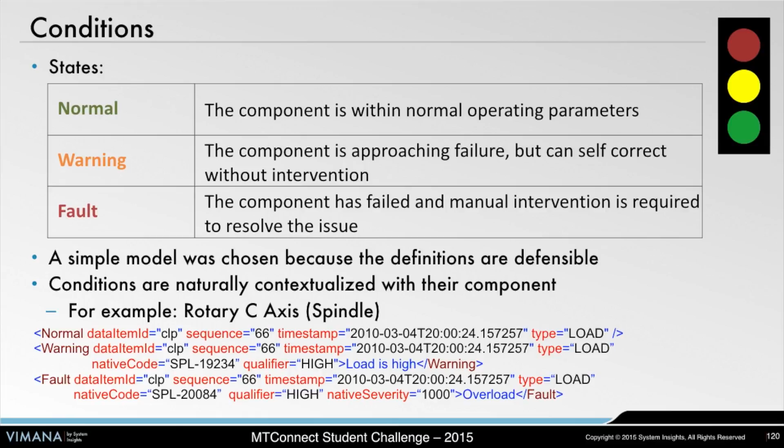An interesting thing about conditions is that usually you'll only have one value per type within a sample at a certain time. In other words, an axis can't be in the same position at the same time, or rather, an axis cannot be in two different positions at the same time.

It's physically impossible. A machine can't be in two states at the same time, at different times. What about a machine with multiple tools, or different paths? You'll break it up into separate components, and each component will have its own path and tool information, path position, and so forth. That's your different heads and so forth. So it's modeled where each one has controller states, because each can be running a separate program, usually with different tooling, different feeds and speeds, and other parameters. All that's captured within the path component of the controller for multitasking.

So at the same time, each component can only be in a single state. Makes sense, except for conditions. You can actually have multiple alarms going off for the same type of alarm, and that's where this occurs. You have this, like with motion programs with multiple syntax errors, you can actually have them listed out here. So you can have multiple faults associated with the same condition.

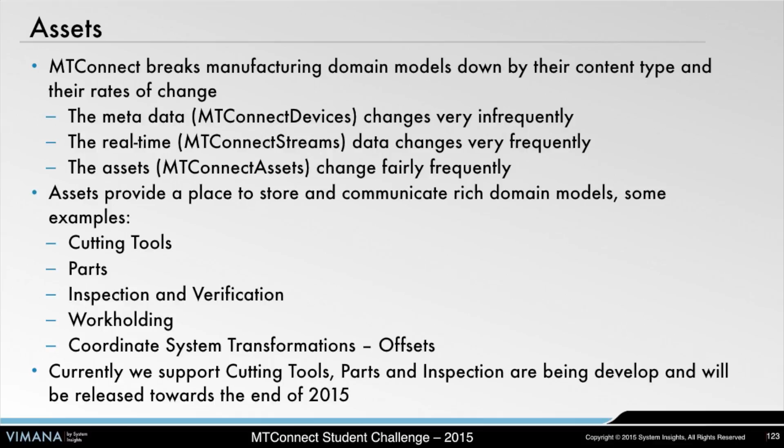We have cutting tools, and we're now getting into parts and inspection. Eventually we're going to get into work holding. These are assets. Assets provide an entire information model about a certain thing. There are two primary concerns we found when we started modeling machine tools and data. The first concern was streaming data, real-time data coming off the machine. The second was data models and information models about certain aspects of the manufacturing process, whether it's a part, a cutting tool, or something used within the manufacturing process.

So assets were the second thing we added, basically a key value store where we can associate an information model with a unique identifier. They're actually going a lot further with this, with targets and other things in the next version, where you can say this asset is for a certain set of devices. That's coming up in the next version.

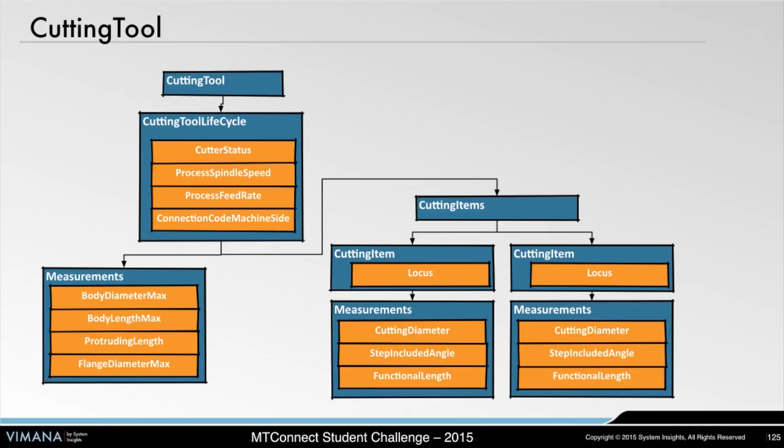With a cutting tool, which is the one we modeled in 1.2, we have things like cutter status, which tells you whether it's new or used or how long it's been, or whether it's broken. We have process values like spindle speeds and feed rates and what type of connector it has, as well as measurements like the diameters, lengths, and functional lengths of each of the cutting items, each of the different inserts. That's what all this is about, and we can model all these different types of cutting tools using a similar semantic to ISO 13399 for the different codes, like these codes here.

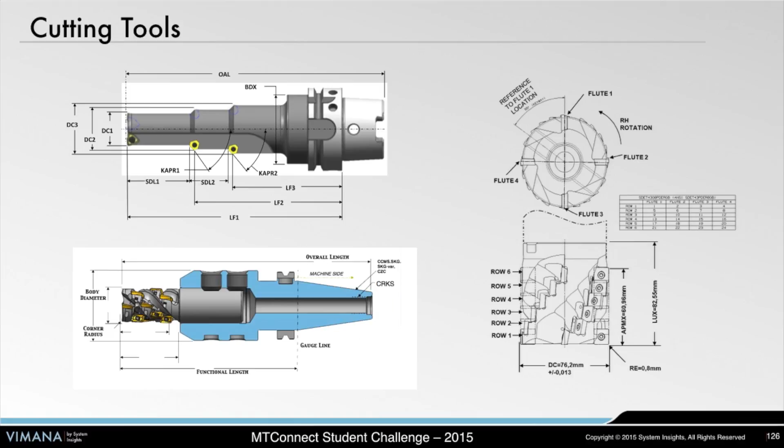We can model things like step drills, but we deal with the use phase of the asset, basically of the cutting tool. Other standards don't deal with that; they just deal with the geometric model of the cutting tool. We deal with how this tool is going to be used, and as it's used, how does it get worn? How does it change? How do the measurements change? That's where we go with this. That's what's so special about MTConnect versus some of the other standards out there right now. And for that, we have these two different models.

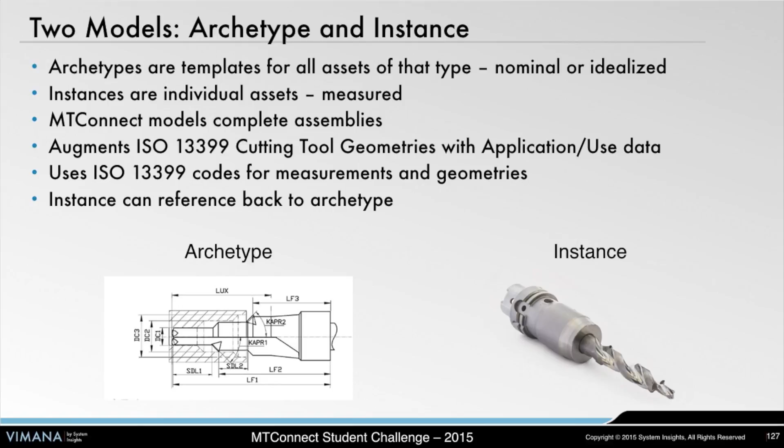We have the archetype, which is your template that says this is the nominal min and max of each of these different measurements. And then we have the actual measurements that are coming off, which is the instance of it, which is each of the builds. Each of the individual cutting tools that are actually used in the process, we provide as an instance.

And we're going to get into parts. Actually, we're very far along, we're actually writing this up right now. So if you're thinking about interesting ideas, we're going to be supporting a full process flow model in MTConnect. I can send you more information on that if you're interested. This will go down to micro-planning, so it's each of the process steps at each one of the machines, all the way down to the activities and the constraints on those activities, feed, speeds, tooling. Anything that we can constrain within sensor data can be expressed within that model.

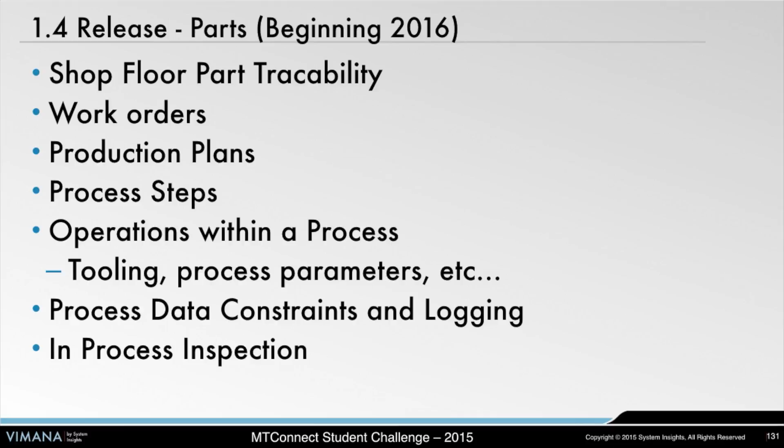So what we've done is we've basically given a data model for the entire digital thread for capturing everything that happened in manufacturing. And next areas that we're going to get into are things like in-process inspection, one that we're working on. So if you're thinking about ideas around measurement and tolerances and so forth, that's an area we're going to be modeling fairly soon.

You can create new data item types by just putting them in there. New component types by adding them in again. And the agent itself will recognize and be able to extend. So if you put a new data item in there with a new name, it'll automatically do the conversions for you and make everything work nicely.

So what I want to get into, sort of wrap things up, maybe take a couple of questions at the end, is the open source solutions that are out there. So there's already a lot of tools out there, so you want to start with MTConnect and play around with it.

There is a GitHub site, github.com/MTConnect. Is everybody familiar with GitHub? Okay, a couple of people. GitHub is a great repository and a great version control system for software development. Distributed software development came out of Linux, don't go into the history of that. But it is truly wonderful. And GitHub is one of the principal, or the major, hosters of most open source projects right now.